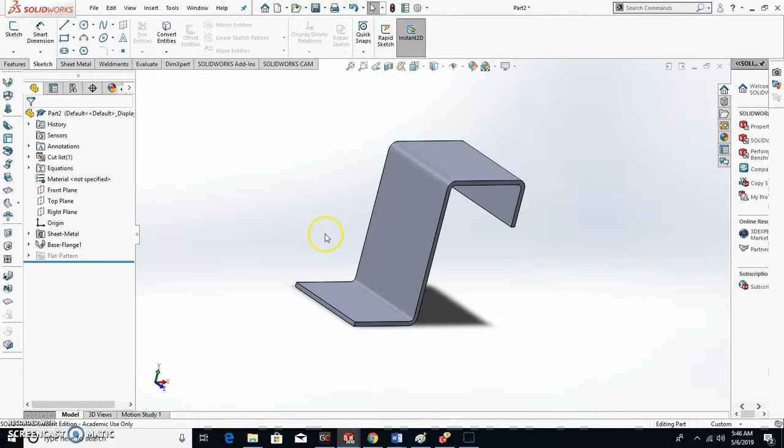So anywhere on the part, you right click. So I right click on the part. You scroll down to export to DXF DWG. Click on it. And then make sure you understand where the location is, where that part is going, where the DXF file is going. And then you click Save.

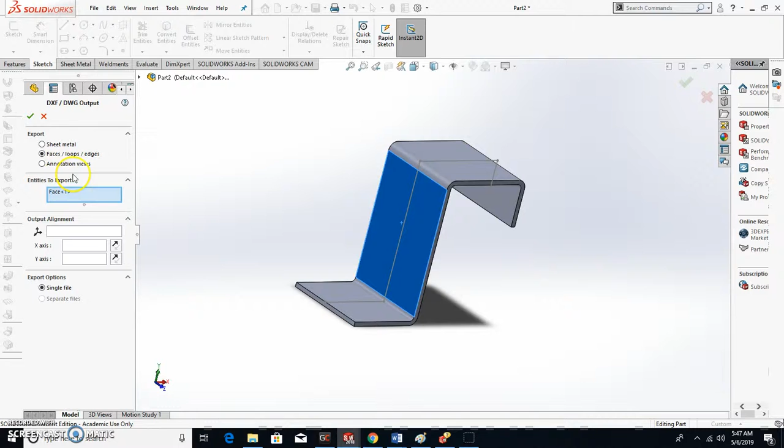And over here, it's very important that you select sheet metal, because that'll put it in a flat state, and only check geometry. And accept that.

Then you'll get a feedback page here. It's not showing much on here other than the rectangle, but that's in the flat state. You say Save. So what I mean by the flat state is if I suppress this or unsuppress that, there's the flat state of the part, showing where all the bend lines are.

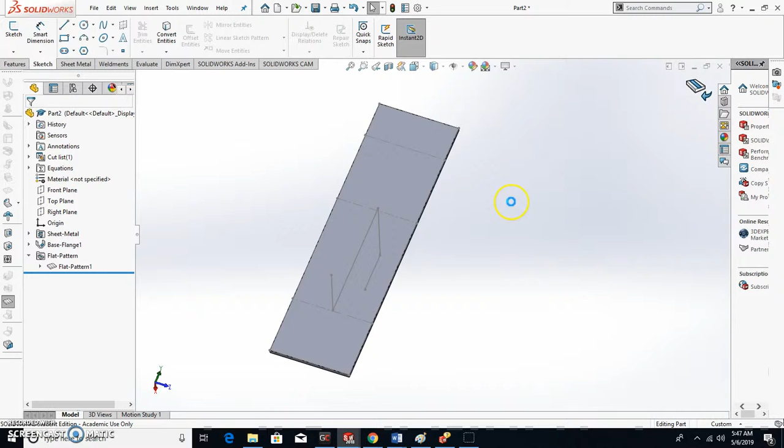Alright, that's one way. That's the one way you save the sheet metal part. Now, just for real quick here, you understand, I'm just going to throw a hole in here.

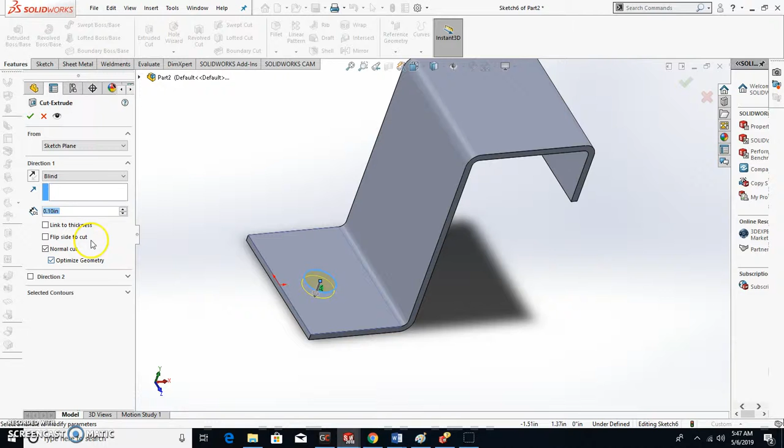Alright, again, I'm going to do a DXF file, right click, export to DXF, save, yes. Again, sheet metal, accept. Now what you should see is that hole. So right there is a hole, and you can click Save.

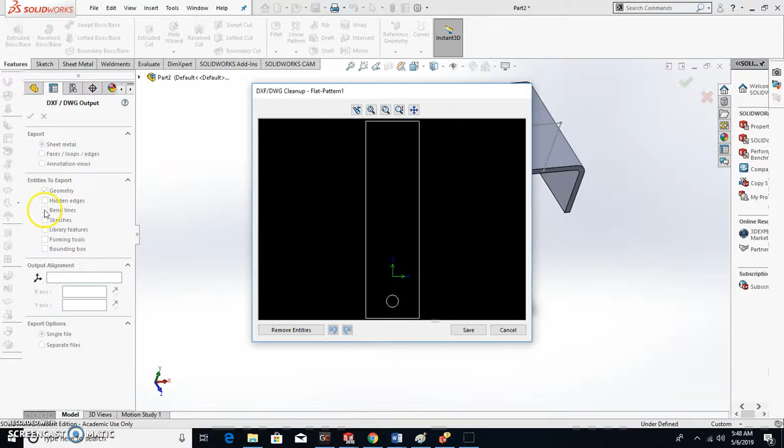If you see lines, like your bend lines across this part somewhere, and you probably had bend lines selected over here, you just want geometry.

Now this file will be put on a jump drive, and we will be taken over to I&D Lab to cut.

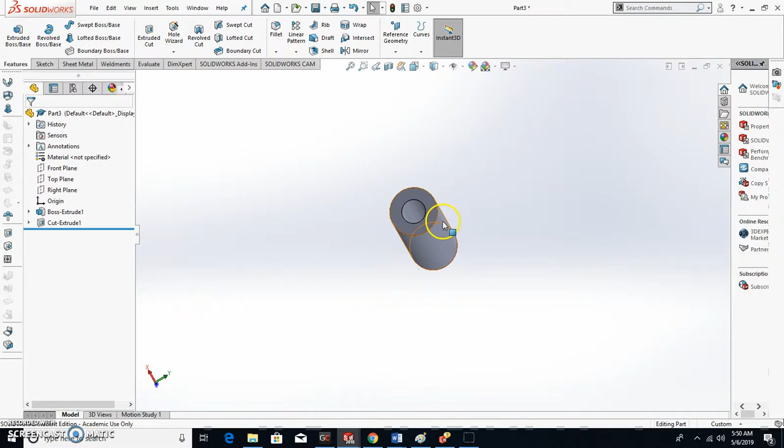Okay, now the parts that need to be cut, the parts that need to be rapid prototyped, that's a different file type. So let's say I'm all done with my design of my part that needs to be rapid prototyped.

You come out to File, you do a Save As, you save it as an STL, this right here, STL extension. Now you will find in here a folder, and because I'm at home recording this, in here folder called Rapid Prototyping, and that's where that file gets saved.

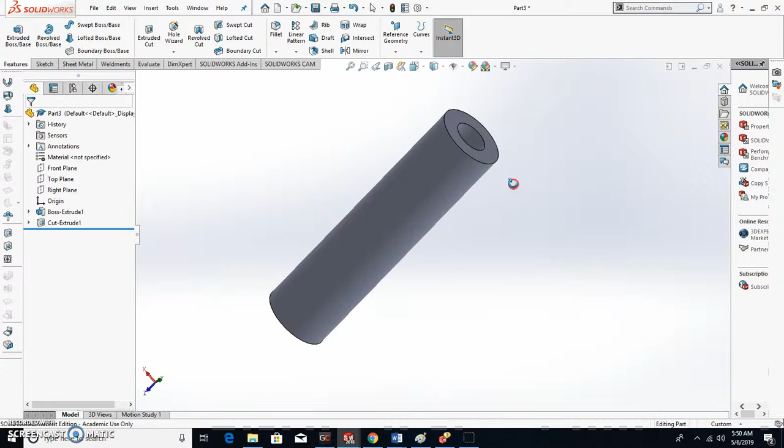The best way to do this is save it by your name. Oops, no, I should have done that. STL. So your name, and then hit save and make sure it's in the folder, and just let me know, and then I will send that to the Rapid Prototyper.